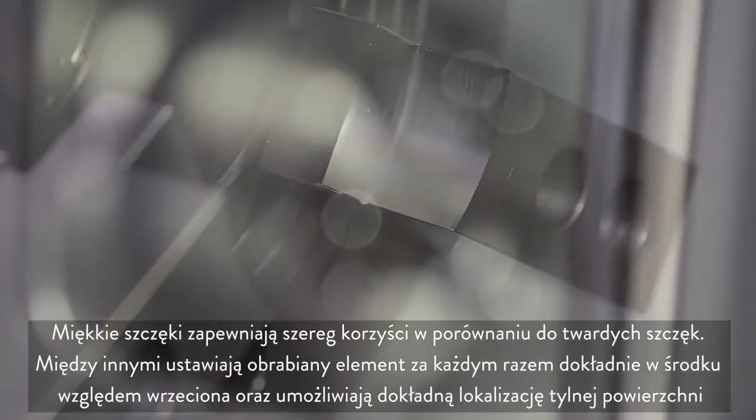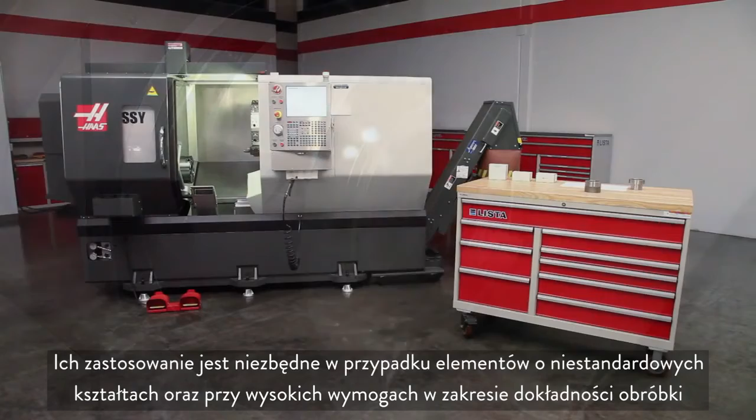Soft jaws offer several benefits not provided by hard jaws. They align the workpiece exactly to the spindle center every time and locate the back face precisely. They are required when holding difficult shapes and any part that must be made accurately. Today, we are joined by Andrew, one of our Haas certified technicians. In this video, we will demonstrate the proper way to cut OD gripping soft jaws and cover soft jaw fundamentals.

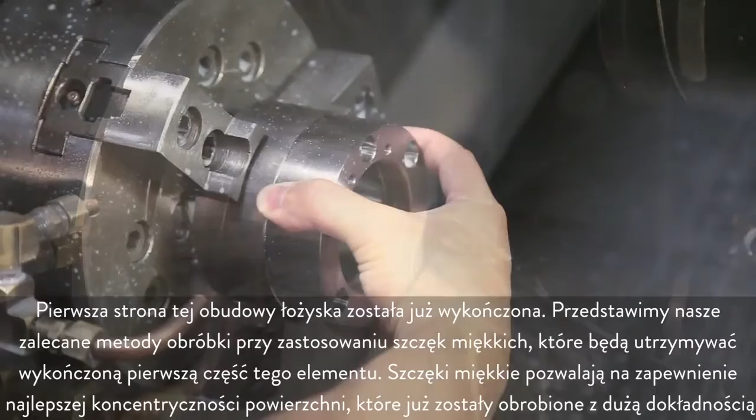The first side of this bearing housing has been completed. We will show you our recommended soft jaw cutting methods as we make the jaws to hold the finished first side of this part. Soft jaws will allow us to maintain the best concentricity to the accurate surfaces we've already machined. Before we start cutting, let's go over some soft jaw fundamentals.

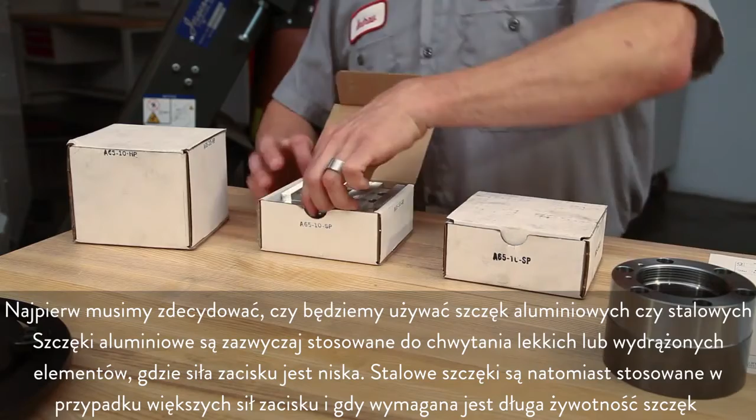First, we need to choose whether we'll use aluminum or steel jaws. Aluminum jaws are typically used to grip lightweight or hollow parts where clamp force is low. Steel jaws will be used where clamping forces are higher, and jaw longevity is important.

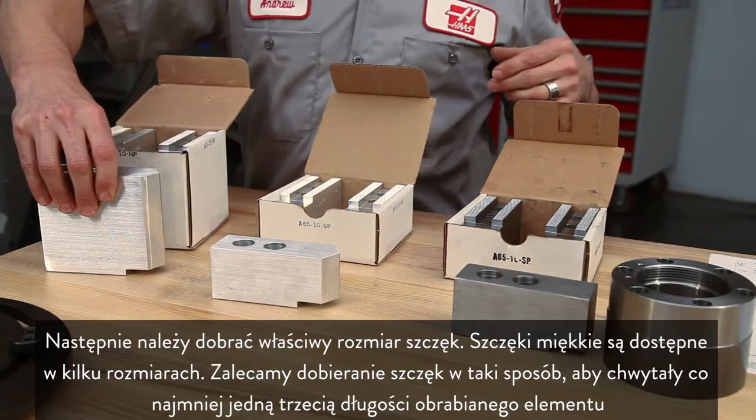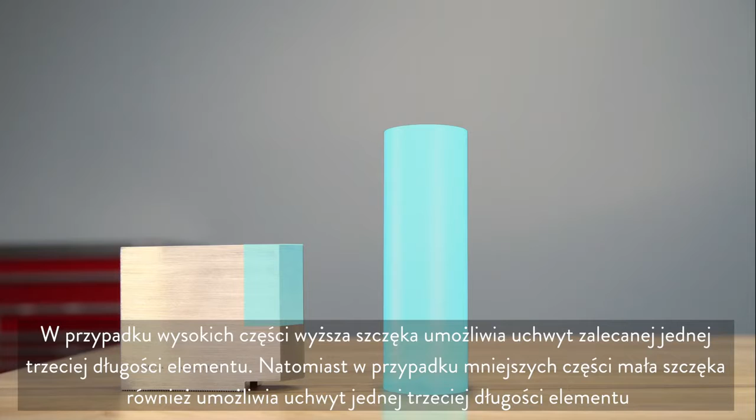Second, it's important to choose the right-sized jaw. Soft jaws are available in a few different sizes. When choosing a jaw, it is recommended that you hold at least 1/3 of the workpiece length. For a tall part, we can hold the recommended 1/3 length with a taller jaw. And for a smaller part, we can still hold 1/3 of the part with a small jaw.

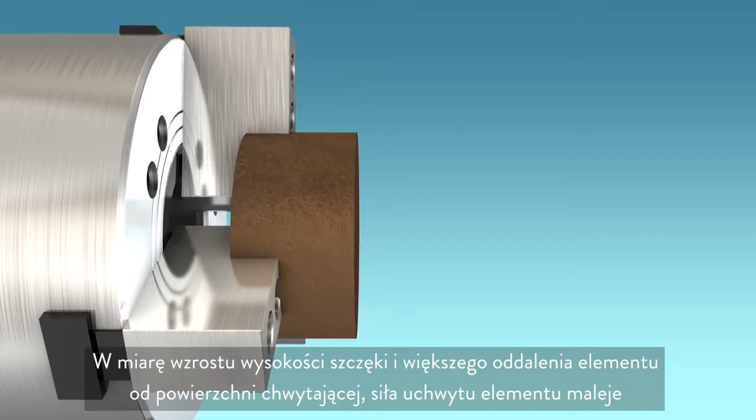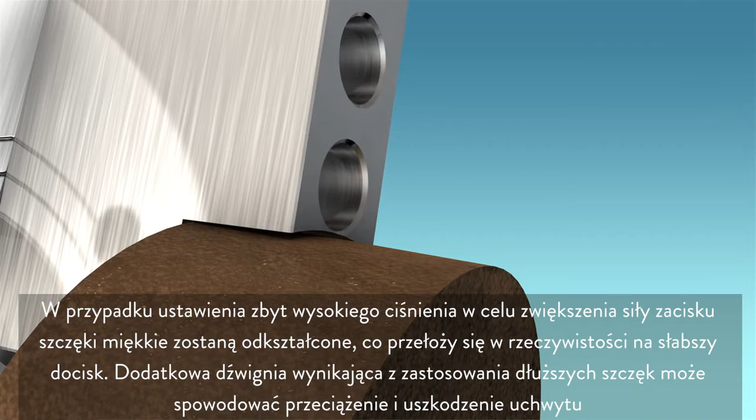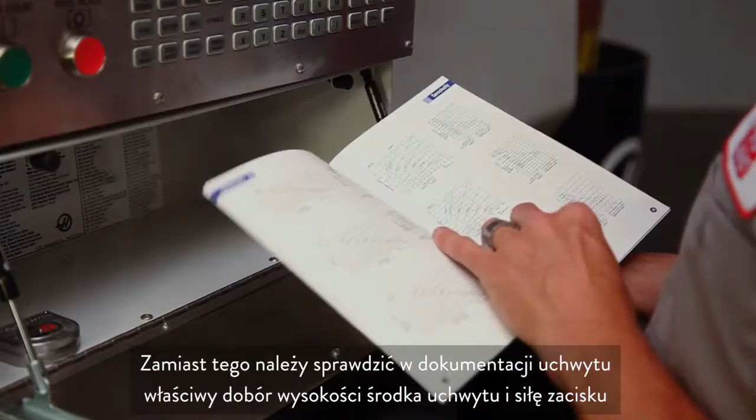As the jaw height increases and the part moves away from the chuck face, the clamping force on the part naturally decreases. If the clamping pressure is set too high, in an attempt to increase the clamping force, the soft jaws will be distorted, actually decreasing grip force, and the additional leverage from the longer jaws can overload and damage the chuck. Instead, refer to your chuck documentation to find a balance between grip center height and clamping force.

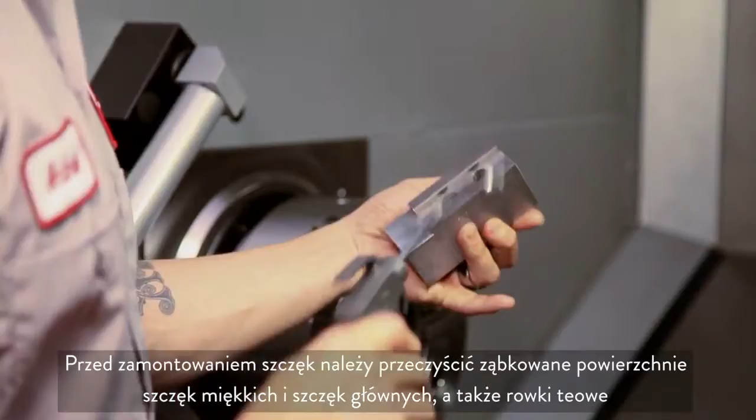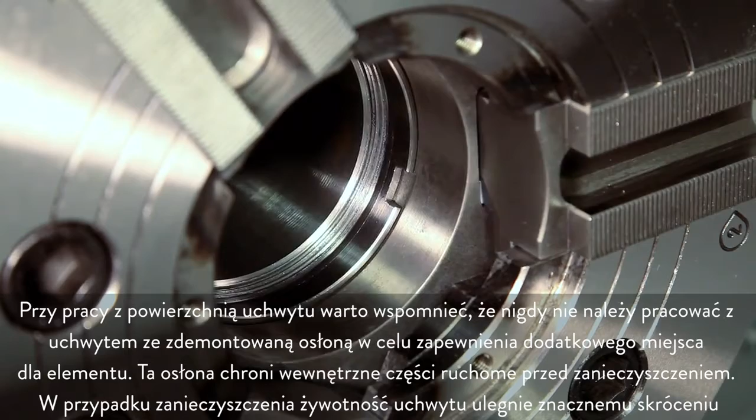Before we mount the jaws, it's a good idea to clean the serrated faces of the soft jaws and master jaws and the T-slots as well. While we are working at the chuck face, it is worth noting that you should never operate the chuck with the cover plate removed in an attempt to gain additional part clearance. This cover protects the internal moving parts from contamination. If contamination occurs, chuck life can be significantly reduced.

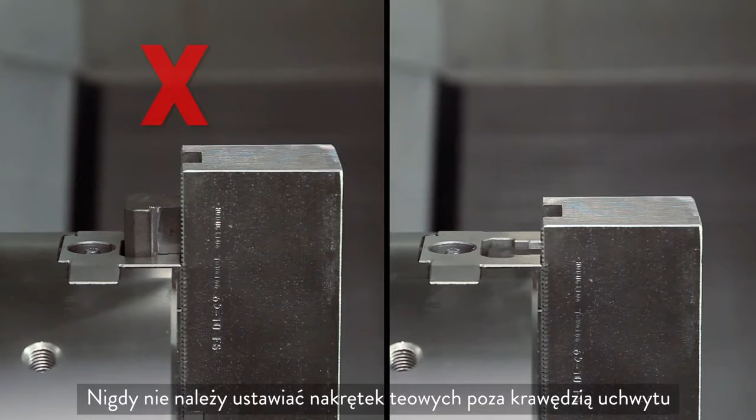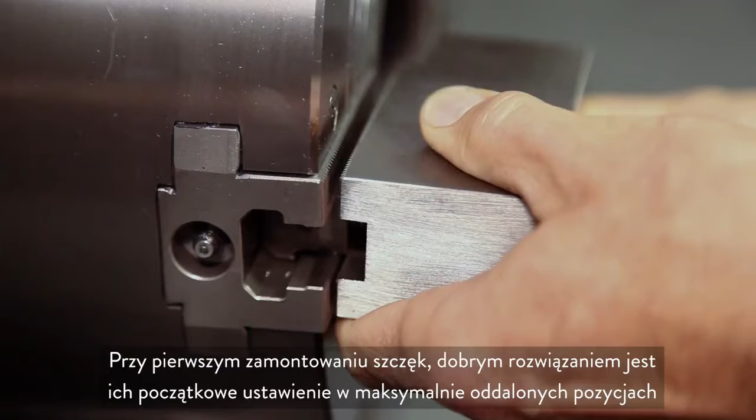You can mount your jaws in a variety of positions, but we chose this position in order to conserve our jaw thickness since we plan to reuse these in the future. Never position the jaw T-nuts outside of the edge of the chuck body. When first mounting the jaws, it's a good idea to set them out as far as possible, just as a starting point. Andrew positions the jaws outwards until the T-nuts are near the edge of the chuck body.

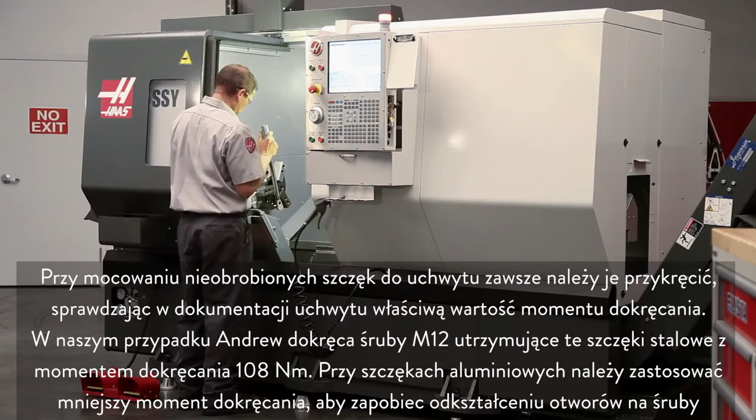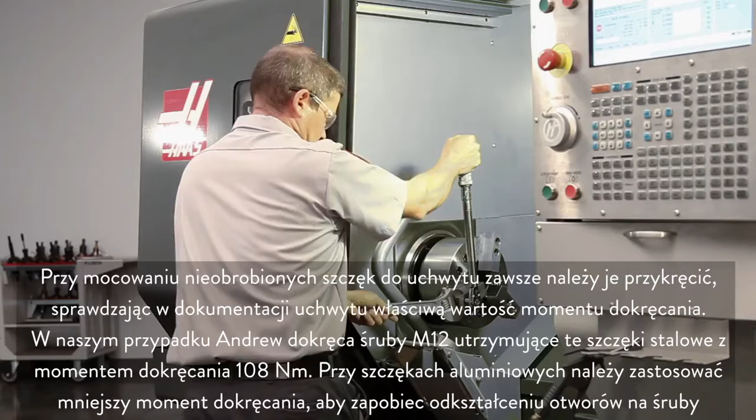When attaching the uncut jaws to the chuck, always torque the jaws in place and refer to the chuck documentation for the correct torque value. In our case, Andrew will torque the M12 bolts holding these steel jaws to 80 foot-pounds. Use a smaller torque value for aluminum jaws to avoid distorting the screw seats.

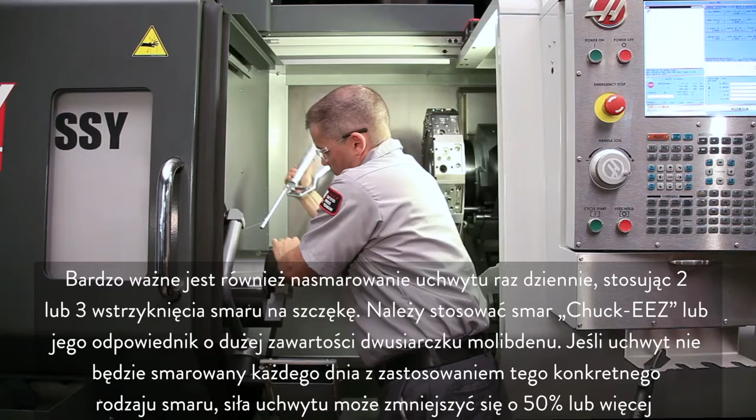It is also extremely important to lubricate the chuck once a day using 2 or 3 pumps of grease per jaw. Use Chuck-EEZ grease or an equivalent boundary lubricant with a high percentage of molybdenum disulfide. If you aren't lubricating the chuck every day using this specific type of grease, clamping force can diminish by 50% or more.

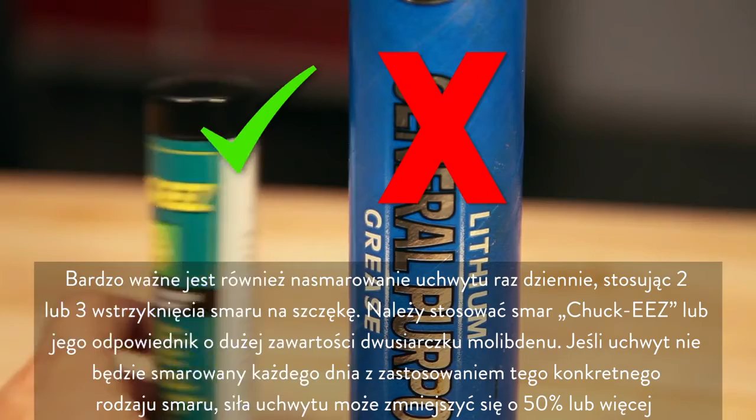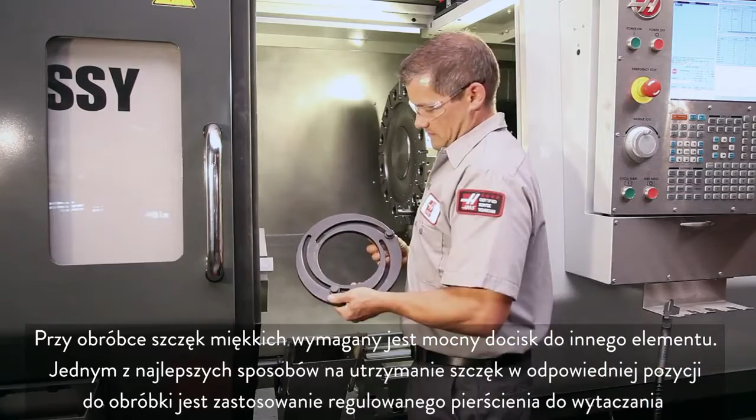When machining soft jaws, they must be clamped tightly against some type of object. One of the best ways to keep soft jaws in position for cutting is to use an adjustable boring ring. The boring ring has 3 adjustable dowels that are meant to be inserted into the jaw screw holes. These slide along the slotted ring body during adjustment and lock in place against the ring when the jaws are clamped. This design allows for slight changes in clamping position to be made easily.

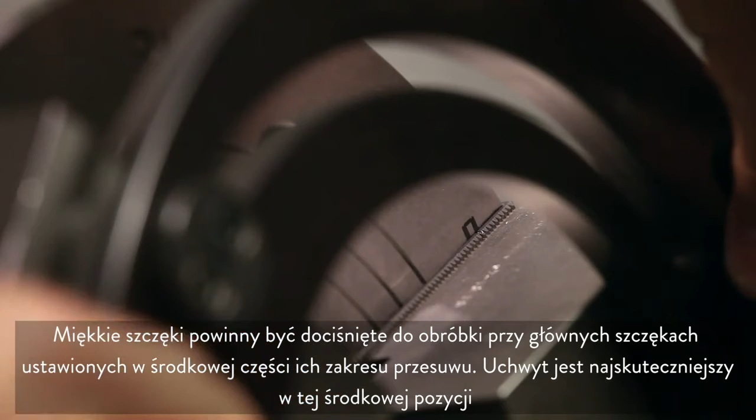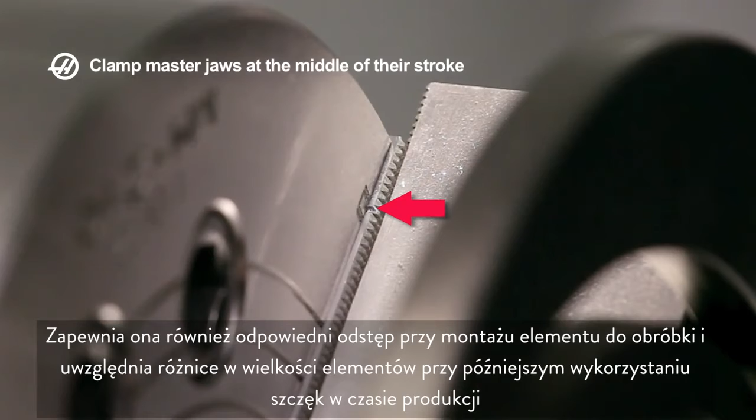When the soft jaws are held tight for cutting, the master jaws should be at the middle of their travel. The chuck clamps most efficiently at this middle travel position. This also allows for adequate clearance when loading parts and for variations in workpiece size when the jaws are used later in production. On Andrew's initial ring placement, we see that he is clamped at the very top of travel.

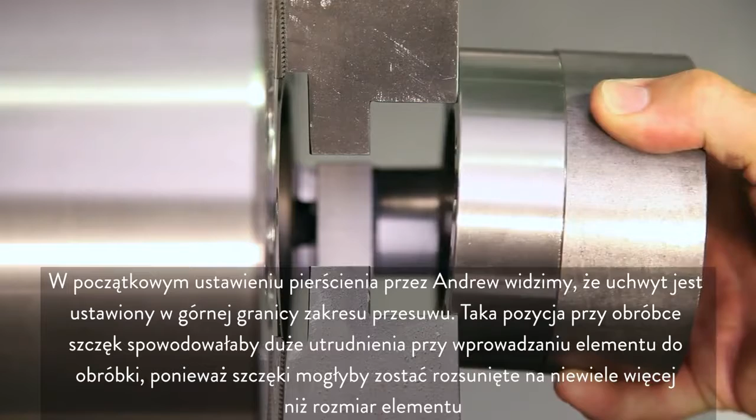Machining the jaws at this high stroke position would make part loading very difficult, since the jaws would only open a fraction larger than the part size. Conversely, if Andrew were to machine the jaws at a low stroke position, the result would be jaws that have very little travel remaining to grip the part past the nominal diameter.

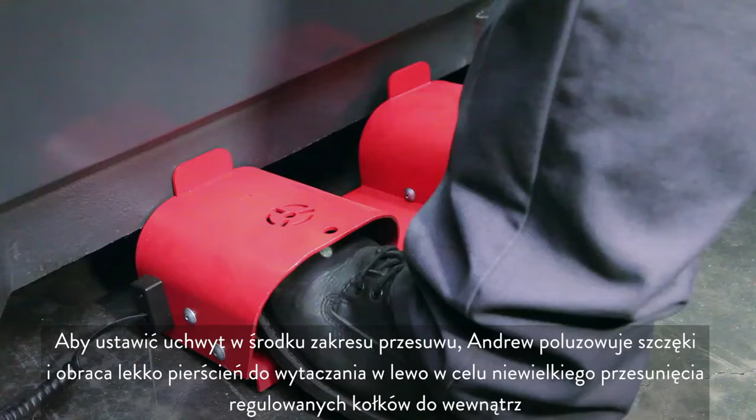In order to clamp in the desired center of stroke, Andrew unclamps the jaws and rotates the boring ring body slightly, counterclockwise, to bring the adjustable dowels inward slightly. The boring ring is now clamped at the center of the stroke.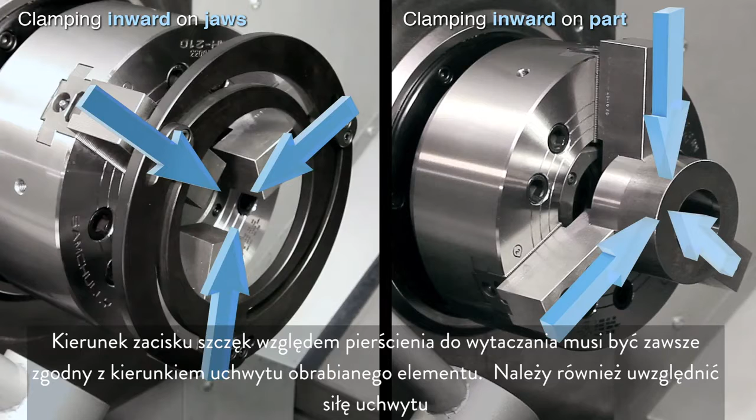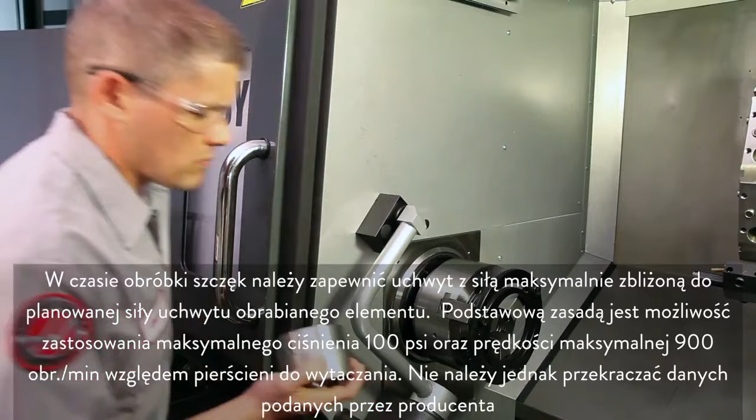As you look at your setup, visualize the direction you will be clamping in. Always be sure to clamp with the jaws against the boring ring in the same direction that you will hold the workpiece. Also, visualize the amount of force you will be clamping with. During jaw cutting, clamp the jaws with a force as close as possible to your planned part gripping force. As a basic rule, adjustable boring rings can be used up to 100 psi maximum pressure and 900 RPM maximum speed, but don't exceed the manufacturer's specifications.

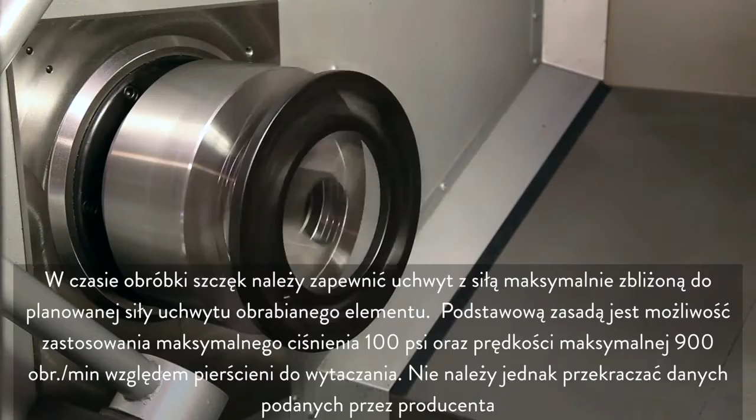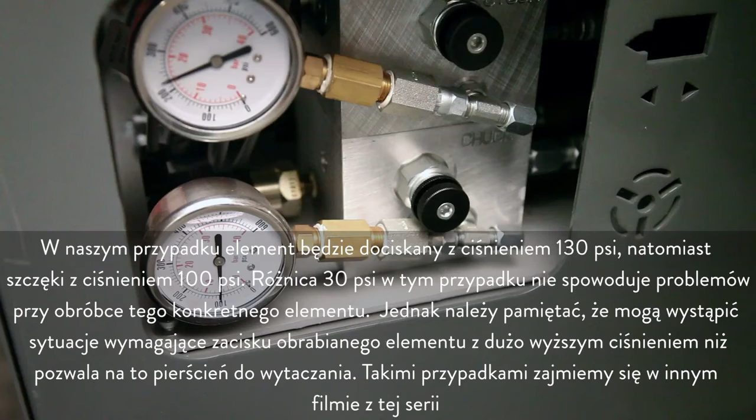In our case, we will be clamping the part at 130 psi and the jaws at 100 psi. The difference of 30 psi between these two pressures is not enough to cause problems on this particular part. Keep in mind that there are many situations where you will need to clamp your workpiece at a pressure much higher than your boring ring will allow. We will address that scenario in another video in this series.

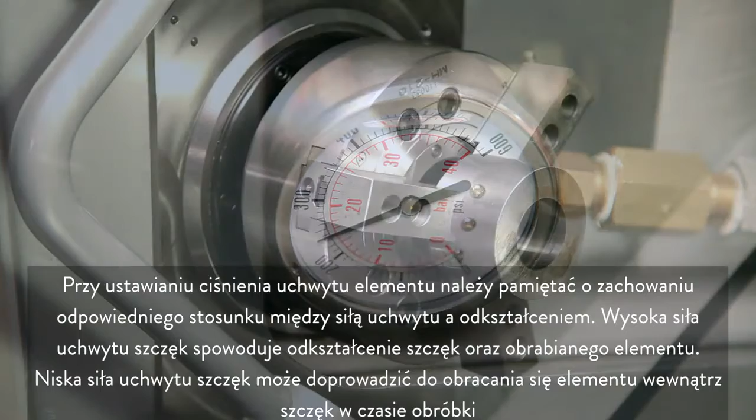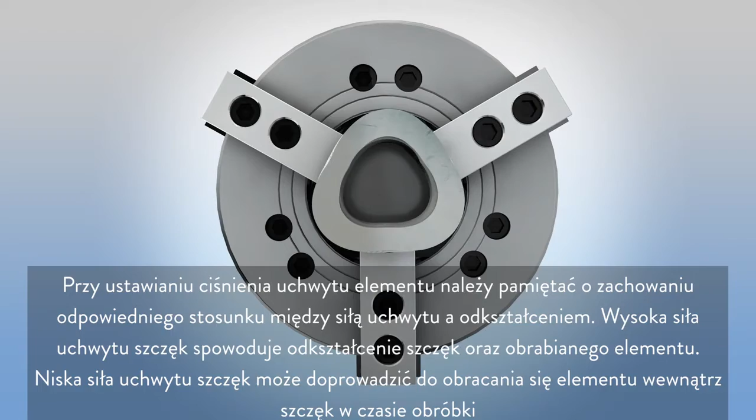When you are setting the part gripping pressure, remember there should be a balance between holding force and deformation. High jaw force deforms both the jaws and the workpiece. Low jaw force may allow the workpiece to spin inside the jaws during machining. It's a good idea to reference the chart posted on the side of your machine.

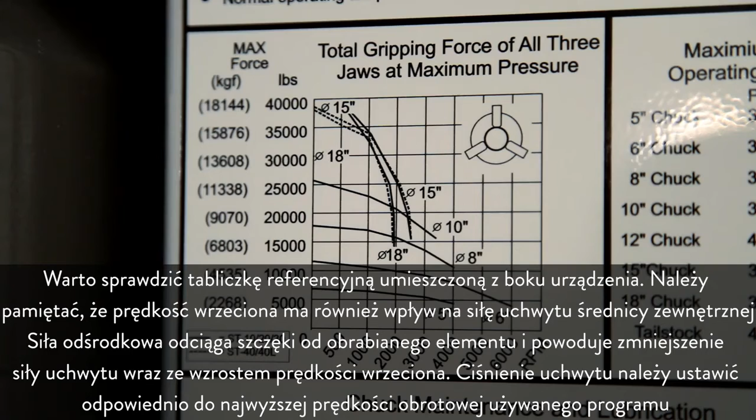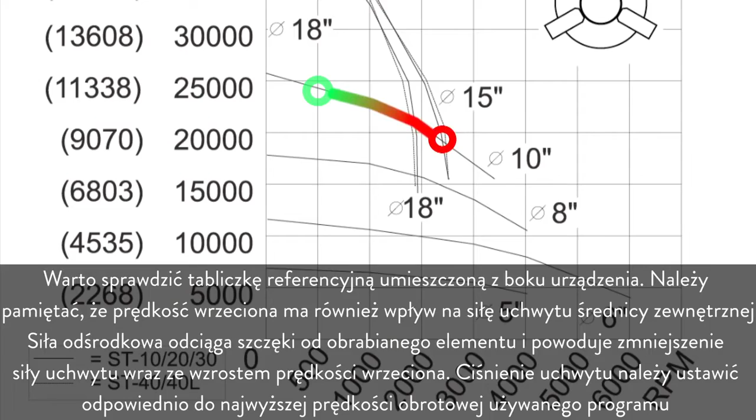Remember, spindle speed also affects outside diameter holding force. Centrifugal force pulls the jaws away from the workpiece and reduces gripping force as spindle speeds increase. Set your chuck pressure based on the highest RPM in your program.

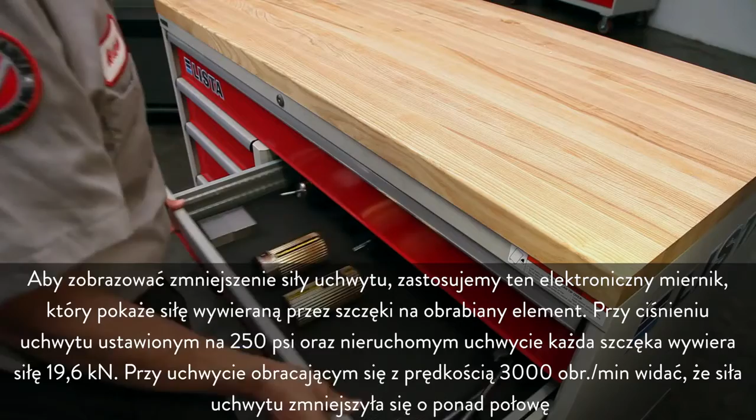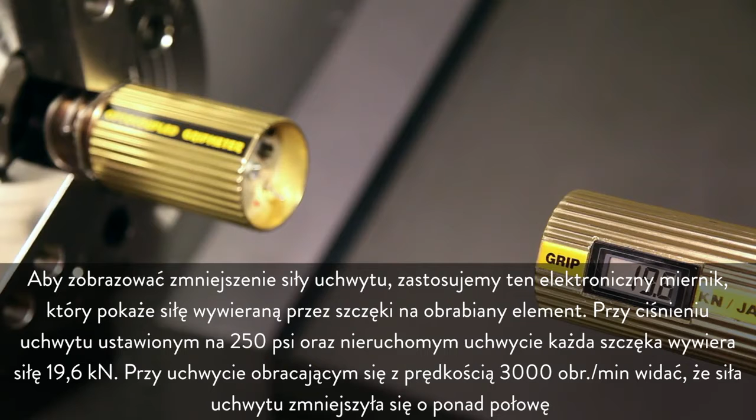To demonstrate the loss of gripping force, we will use this electronic gauge, which displays how much force each jaw is exerting against the workpiece. With our chuck pressure set at 250 psi and the chuck stationary, each jaw is pushing with 19.6 kilonewtons of force, or 13,000 pounds of total force. With the chuck spinning at 3,000 RPM, you can see that the clamping force is reduced by more than half.

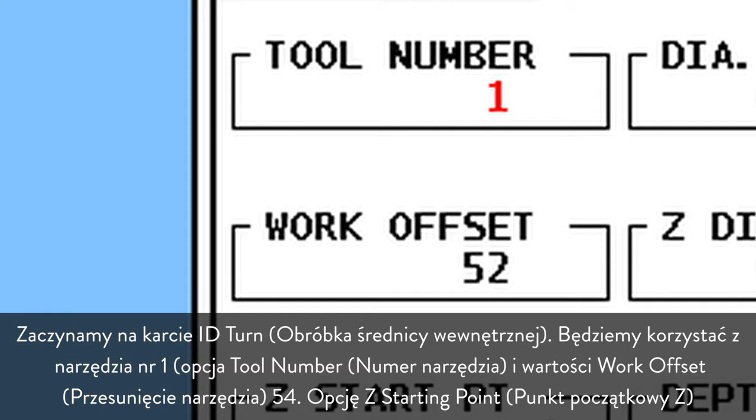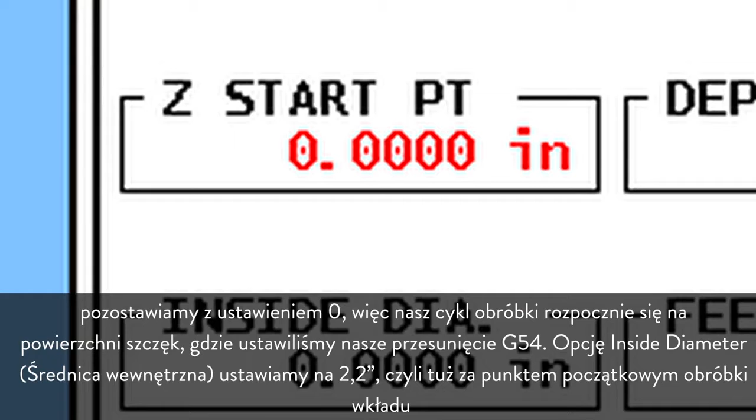Now that our preparations are complete, we can use the Haas intuitive programming system to set up our jaw boring operation. We start at the ID Turn tab. We'll be using Tool 1 and work offset 54. We leave Z starting point set to 0, so our boring cycle will start at the face of the jaws, where we set our G54 offset. We set inside diameter to 2.2 inches, just clear of where the insert will start cutting.

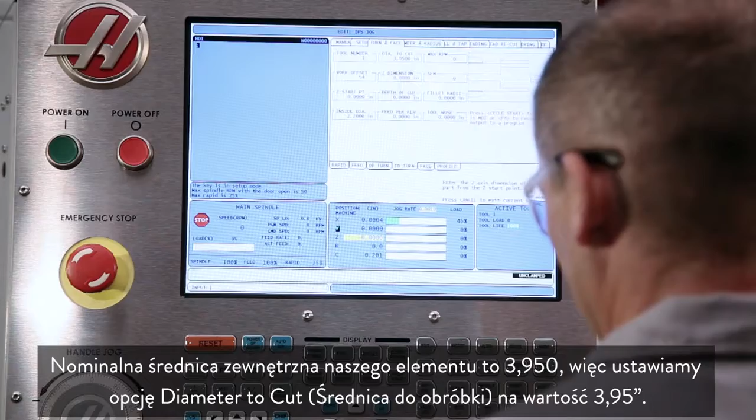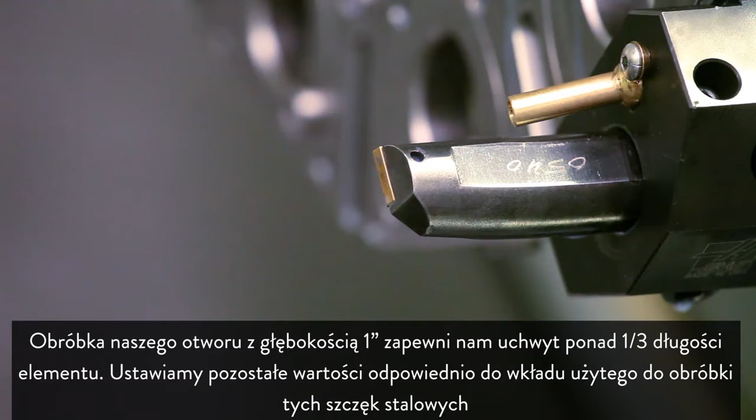Our part's nominal outside diameter is 3.950, so we set diameter to cut to 3.95 inches. Cutting our bore to 1 inch deep will give us more than 1/3 part length grip. We set the remaining values conservatively based on the insert we're using to cut these steel jaws.

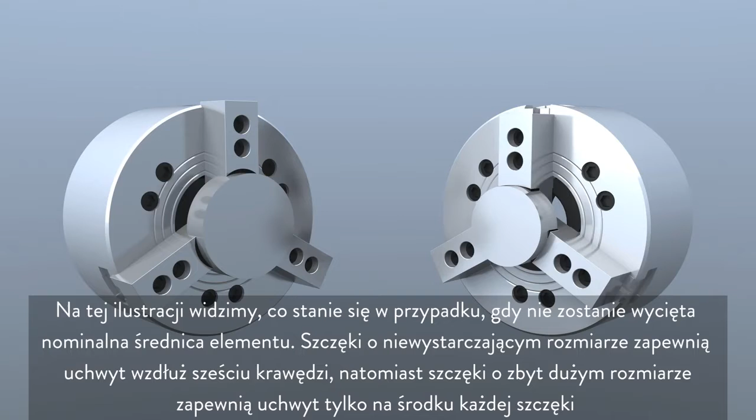When boring OD gripping soft jaws, cut the inside diameter of the jaws to the nominal workpiece diameter. In our case, the blueprint shows a diameter of 3.950, and so we will bore to the size of 3.950 inches. This graphic illustrates what would happen if you did not cut the nominal part diameter. Undersized jaws will grip along 6 edges, whereas oversized jaws will grip only along the center of each jaw.

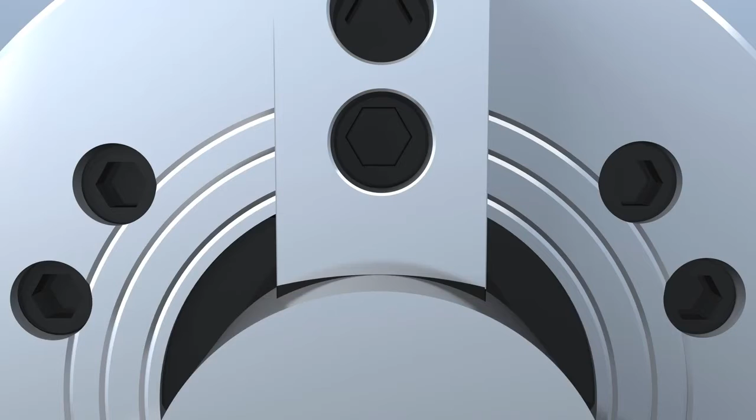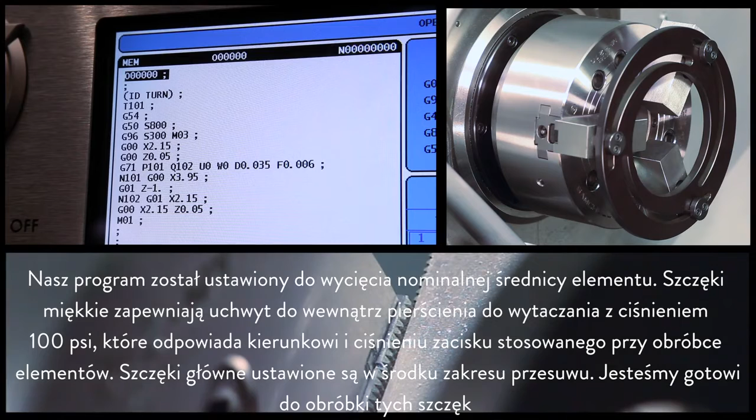Our program is set to cut at the nominal part diameter. The soft jaws are clamping inwards on the boring ring at 100 psi, which matches the direction and pressure we'll use when cutting the parts. The master jaws are at the center of their stroke. Now we're ready to cut these jaws.

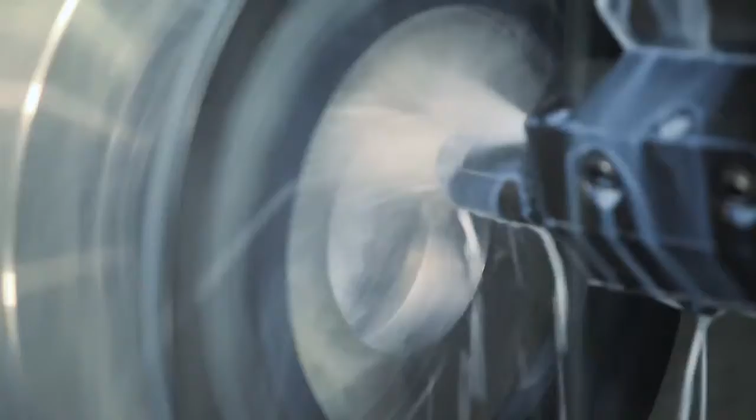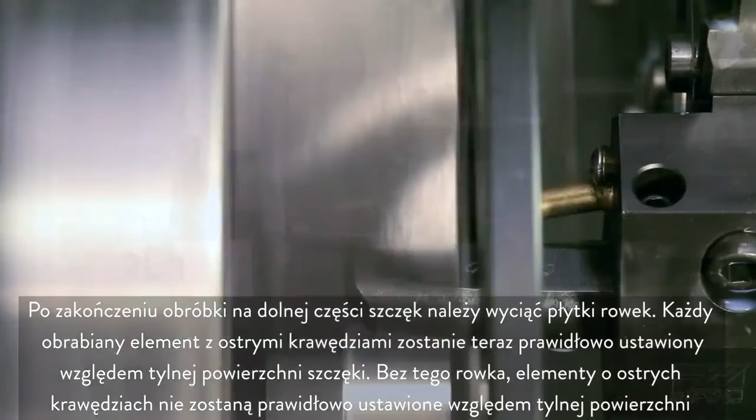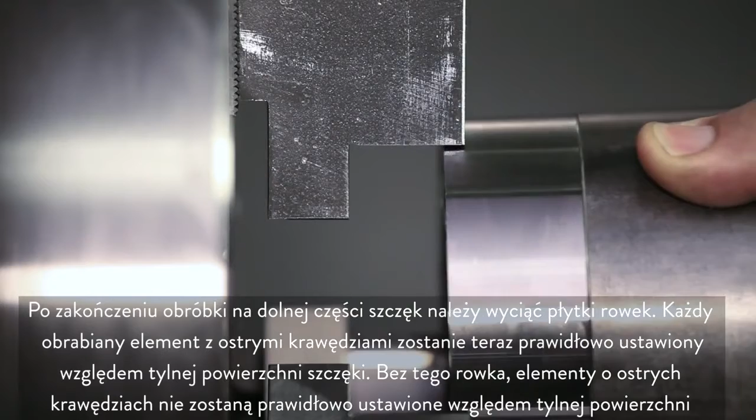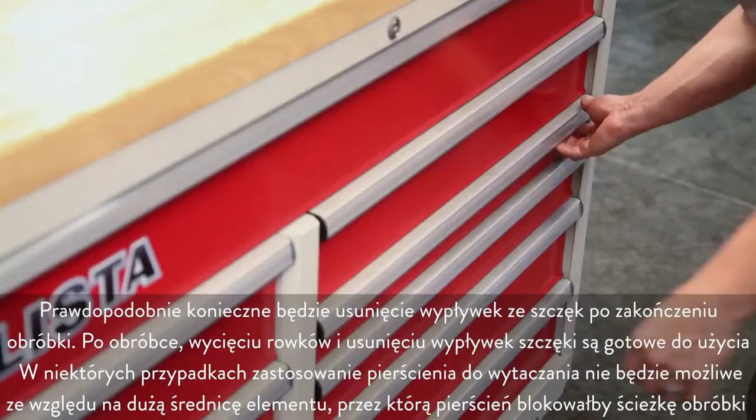Once the jaws have been cut, make a shallow groove at the bottom of the jaws. Any workpiece with sharp edges will now locate correctly against the jaw's back face. Without this groove cut, a sharp-edged part will not locate correctly on the back face. You will likely need to deburr the jaws when the machining is complete. Now that they have been bored, grooved, and deburred, these jaws are ready for use.

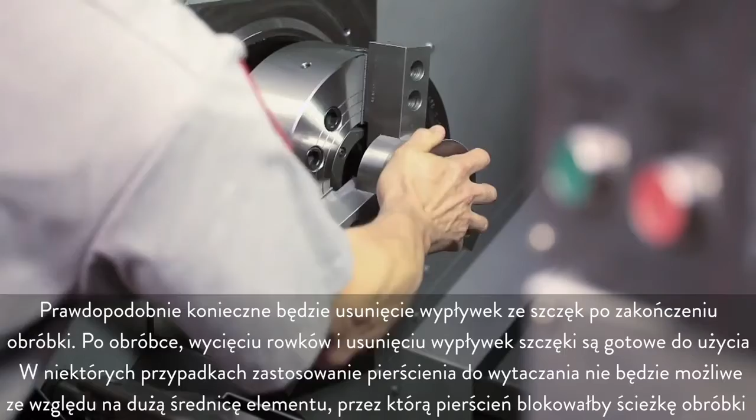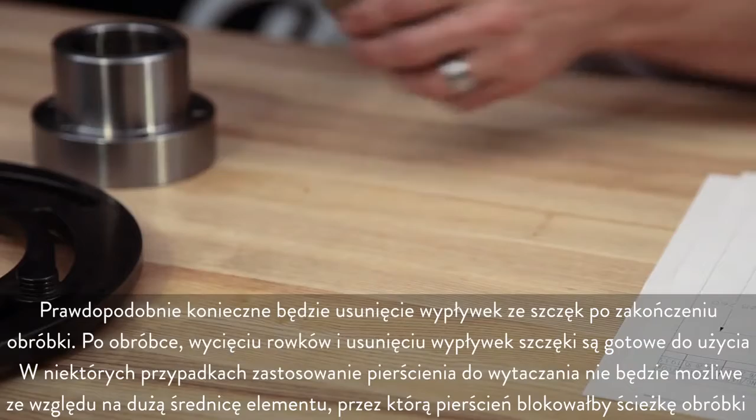In some cases, you won't be able to use the adjustable boring ring because the part diameter is so large that the ring itself will block your cutting path. That's exactly the case with this part here. In this case, since we can't use a boring ring, consider using a plug of material to hold the jaws in position.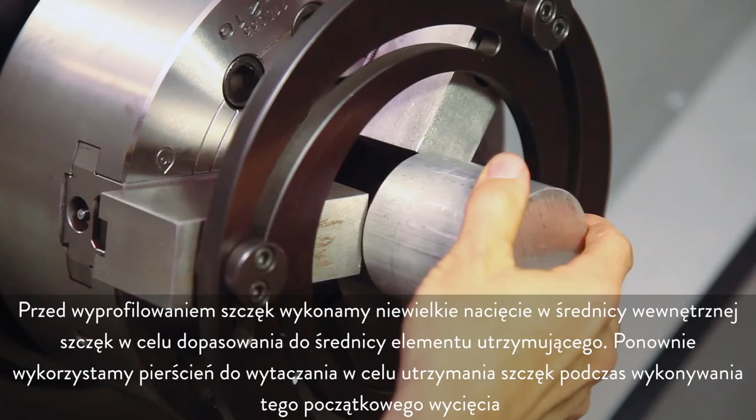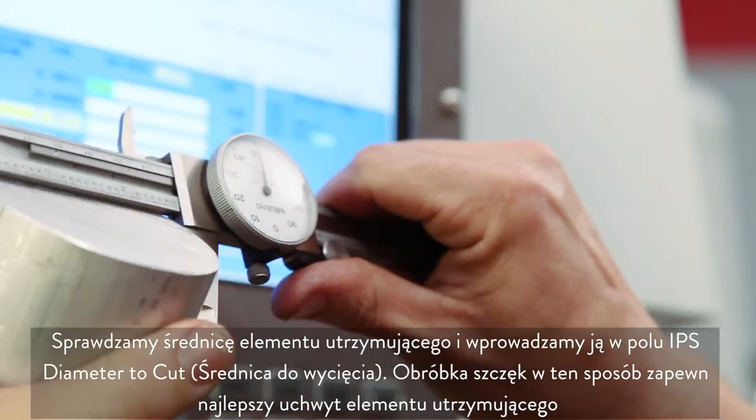Before profiling the jaws, we will take a small cut on the inside diameter of the jaws equal to the plug diameter. We will use the adjustable boring ring again to hold the jaws while making this initial bore. We check the plug diameter and enter it into the IPS diameter to cut field. Boring the jaws this way will hold the plug in the best possible manner.

One of the important benefits of using the plug is that you can exert full desired clamping force on the jaws. You can eliminate the need to add a taper to the jaws by matching high jaw cutting pressure to high workpiece clamping pressure. With the bore for our plug complete, we clamp it at the center of the jaws, leaving adequate clearance for the cutting path. We apply the clamping force to the plug in the same direction and pressure that will be used on the workpiece, which in this case is 250 psi.

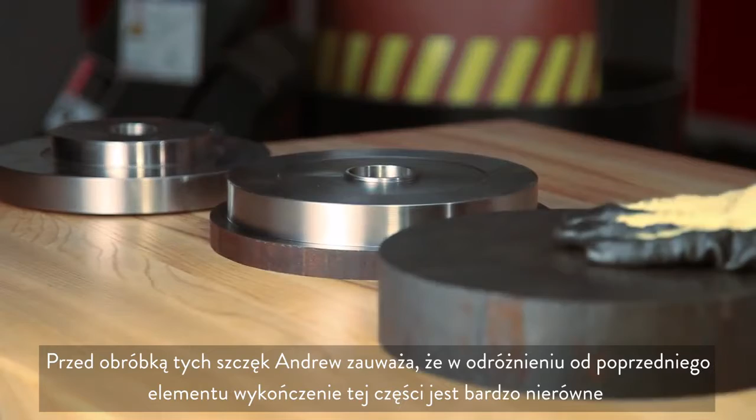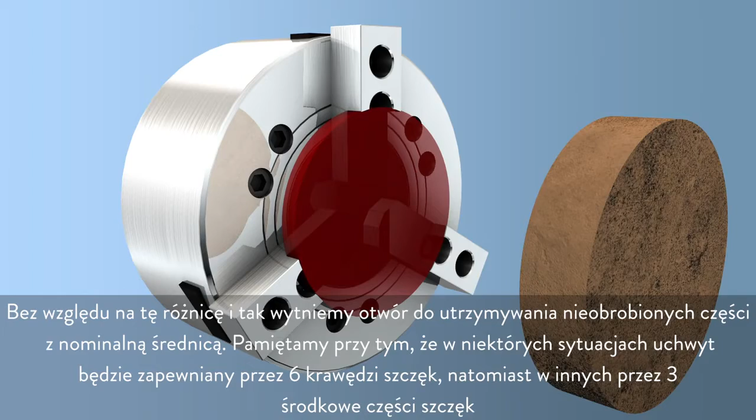Before cutting these jaws, Andrew notes that unlike our previous part, the finish on this material is very rough. Despite this variation, in our case, we will still cut the pocket to hold the raw stock at the nominal stock diameter, realizing that in some cases we will be holding at the 6 edges of the jaws, and other times at the 3 centers. Now, we will be making 2-step jaws for this part, and with our program set to cut both pockets to the nominal size, we are ready to cut our jaws.

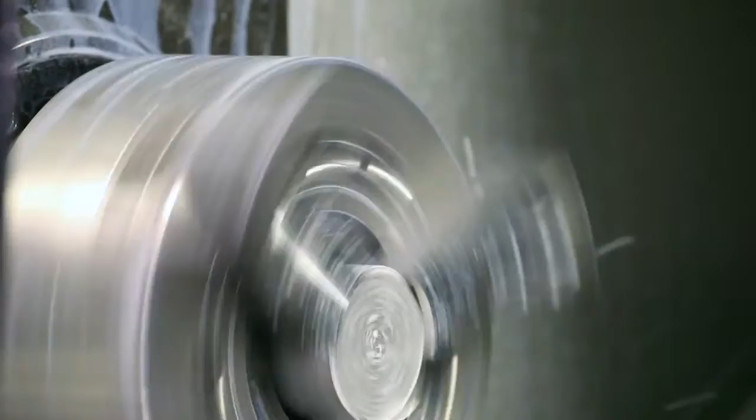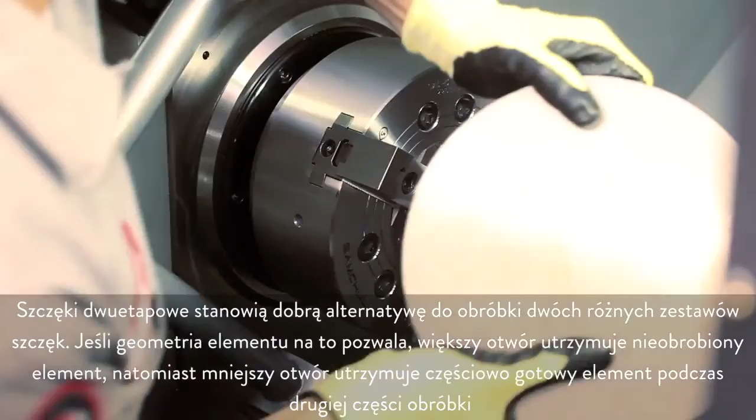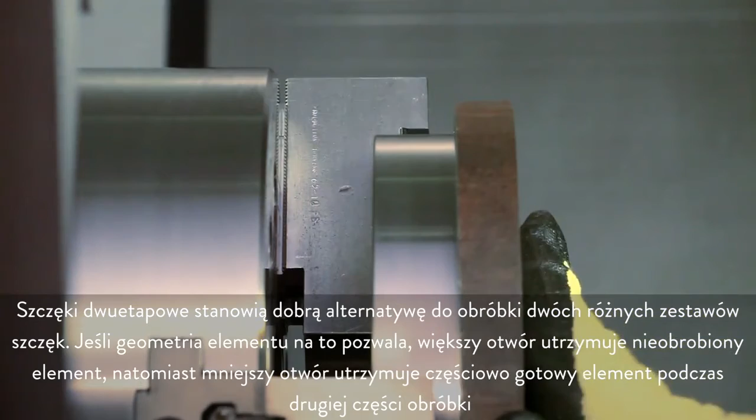Two-step jaws are a good alternative to cutting 2 different jaw sets. When part geometry is favorable, the larger pocket holds the uncut raw stock, while the smaller pocket holds the half-finished part for the second operation. With these 2-step jaws cut and grooved as before, we are ready to start making parts.